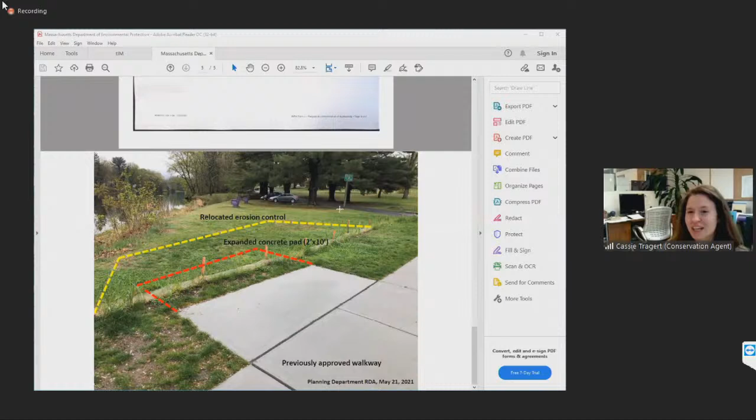Cassie, is that correct? Yeah, it is. I spoke with DEP about it, and you can't amend or extend a request for determination that has been issued, even though they're good for 3 years. So this is just, they needed a new one. So here you are. We can't amend and we can't extend determinations.

So are there any questions from members of the commission? No. Are there any questions from members of the public in attendance?

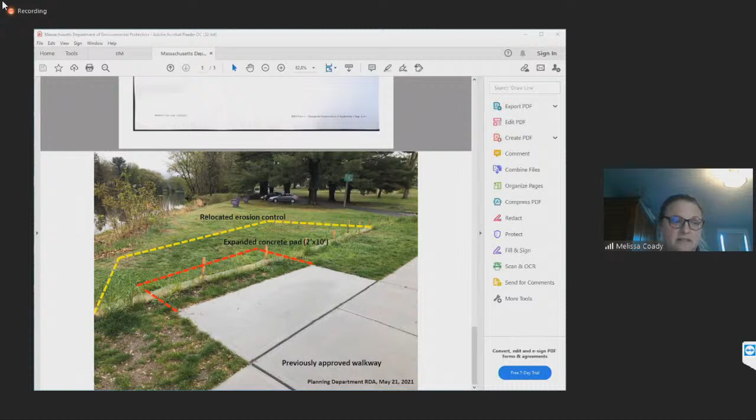Okay, Cassie, how was the previous determination phrased? Let me get the exact wording. I'm just gonna stop my share.

So previously, we issued a negative determination type 3, and the only special conditions were that the commission shall be contacted 48 hours before the start of work to inspect erosion controls, and shall be notified upon completion of the work to inspect the site stability before erosion controls are removed.

Thank you. Would anyone care to, with that in mind, make a motion? Motion to issue a negative determination type 3 with the same condition we had previously for the pre-construction inspection of the erosion controls. I'll second.

All those in favor, roll call vote. August, aye. Busa, aye. Buttrick, aye. Ryan, aye. Teffer, aye. Whittemore, not present. Motion carries. Thank you.

Can I ask one question? Of course. Okay, so based on what I just heard, it sounds like there has to be a 48-hour notice for when it would be poured. Did I understand that correctly? Yes.

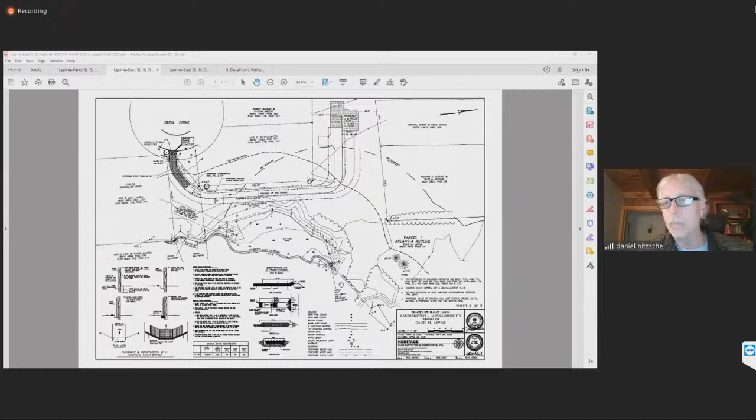So we started over by the detention basin on the southern end along that intermittent stream. I believe the documentation provided to the commission shows the stream stats data that confirms that it is an intermittent stream, despite the fact that local folks believe it flows a lot. It still doesn't meet the criteria of a perennial stream. Its watershed is too small in size.

So we confirmed the intermittent part, and then we delineated the edge of the old farm pond, essentially as a bordering vegetated wetland bordering on that stream down to the outlet structure. And then we flagged again on the downstream side, the B flagging, which is essentially bank flags, except B4 is really a BVW. There's a hill, there's a seep coming out of that slope around flag B4.

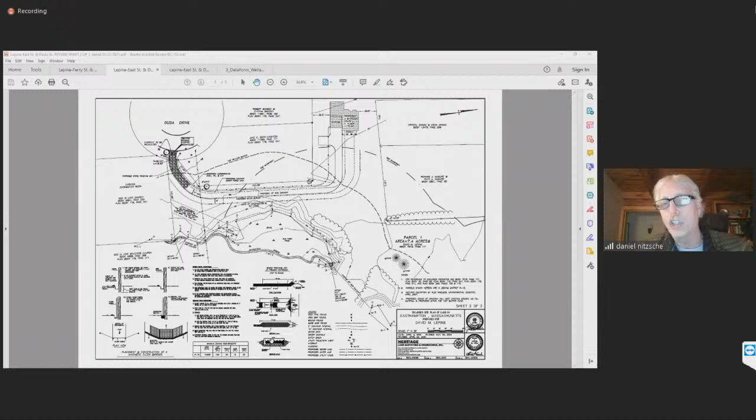So that's representing more of a bordering vegetated wetland point, but the remaining flags are essentially bank, or mean annual high water line, since that's a perennial stream going out in that direction.

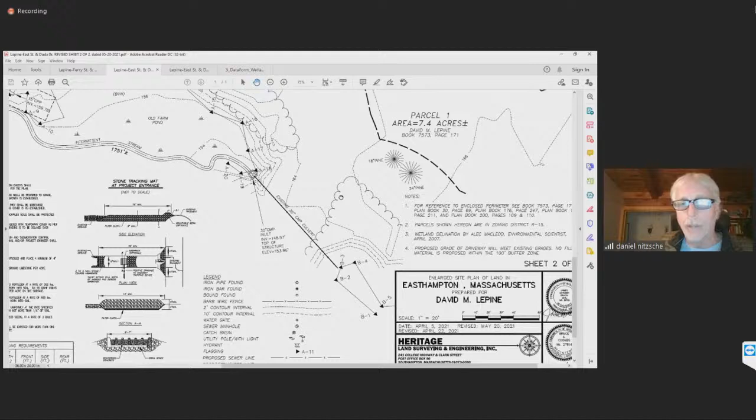And we provide a data form for flag 15 for the commission's review. So not much different than what Alec MacLeod put out there, other than I don't know if he had the drained pond. I'm assuming it was a drained pond at the time, but we had bordering vegetated wetland to that intermittent stream, and then the perennial stream on the outlet end.

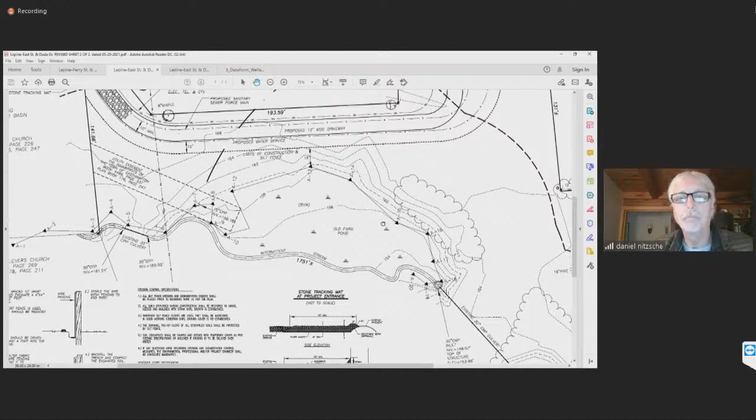Thank you. So with that, we could take questions from the commission.

I think we've covered what was asked of us and made the modifications, and we are in compliance with the regulations.

Thank you. Are there questions from any members of the commission before I ask mine? I had a question, thank you, Deborah. Mark, at last meeting I had asked how much disturbance there would be for the driveway. Were you able to come up with that?

Yes. So with the driveway, with the work within the riverfront area, it is 10,604 square feet within the riverfront area. The remaining section, which is within the 100-foot buffer zone, starts up here closer to Duda Drive and comes around the corner, is approximately 1,800 square feet of work in the 100-foot buffer zone for this area, which is outside the 200-foot riverfront area and within the 100-foot buffer zone.

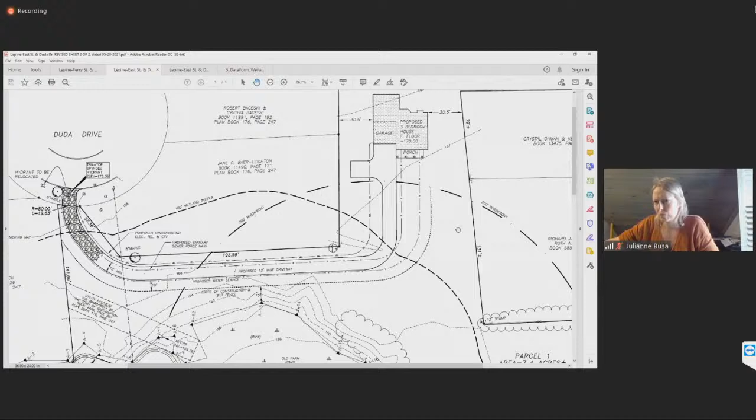So within our letter, which I can share with you, let me share that letter. I should have it here. So these are the performance standards and compliance measures for the entire property. This is part of the application that was submitted to the commission on the 20th. So we have a general narrative on the site conditions, the project description, the work within the buffer zone, the project design considerations.

And then we get into the riverfront area sections and describe the work in those design criteria. And then we go through the standards of A through D being here. So I don't know if you want me to read through those sections or how do you want to handle that?

So Mark, I guess I'm wondering, under no practicable or substantially equivalent economic alternatives, how was the scope of alternatives selected or determined? So what I'm asking is, the regs step through the type of activity relative to when the lot was recorded. Is that addressed in this document?

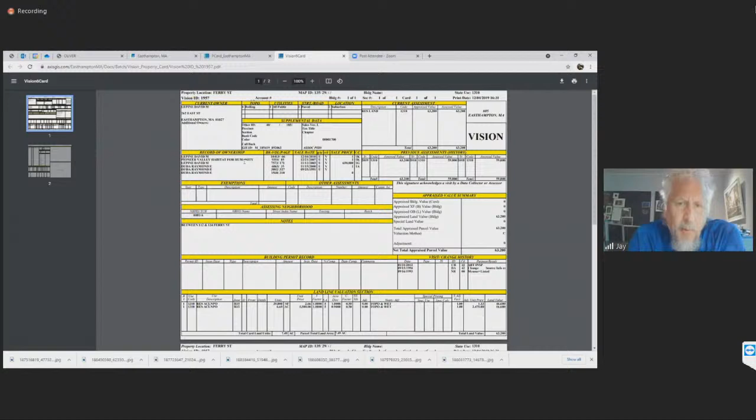I can even go on the registry's website, if you think this would be helpful, and we can go from there too. That might have some information. Right, and that's the original Duda farm parcel, which would be in that 1568, page 310. It's before 90, before 91 at some point.

The other thing, I don't know if this is helpful, I think is probably less helpful, is this other card. I think this is just general current parcel information, showing the last sale. I don't think this is as helpful. I think the previous one has more potentially useful information. Correct, so that was before 91, the next to the last transfer.

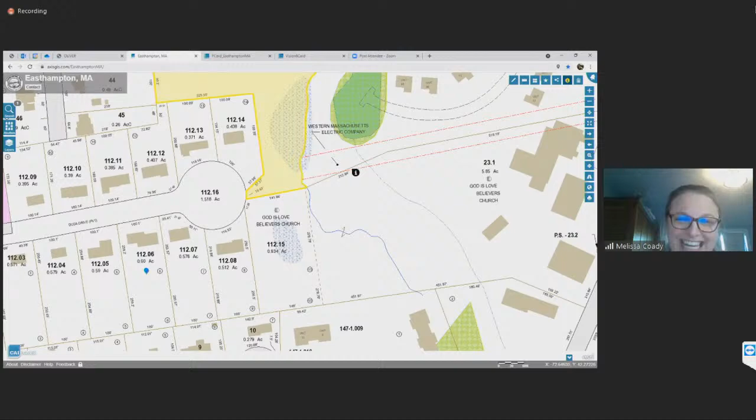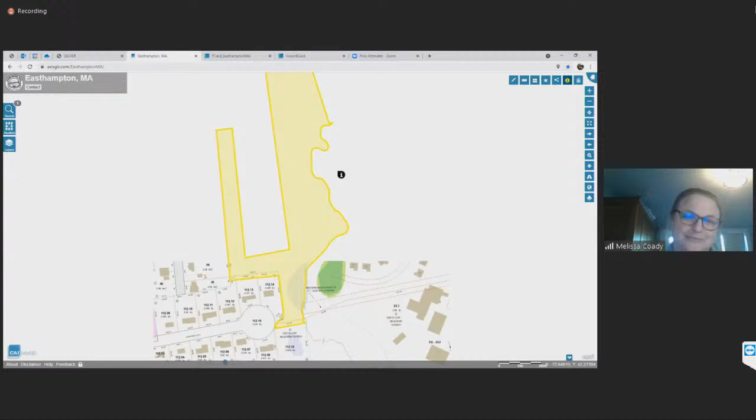And what's the total acreage of the parcel itself, just so we know if there's some continuity by reference in a deed? Oh, that should be here, it should be listed. It's very slow to load, unfortunately. Let me zoom out one more. It shows the total parcel area is 7.4 acres of land, shown on sheet 1.

While Cassie is reviewing that as part of this conversation, Mark, can you share photographs of the riverfront area where the driveway is proposed? Cassie has those based on our site visit that we did. And I can look on the registry of deeds site.

Cassie, is that book 15? Yep, so for the very first one, it's 1568/310. I'll keep this up, I'm gonna stop sharing, I'll pull up the pictures, Melissa, and show you. This is from the site visit. That's a very old deed book.

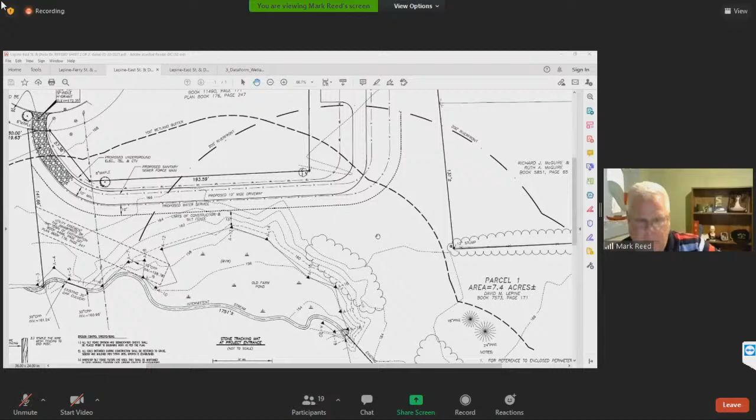Come on, share that picture please. So yeah, I don't believe so, Melissa. When we walked the property, there are no areas that would qualify under that. Unfortunately there's a lot of natural erosion of the embankment because of the steep slopes going all the way out to Ferry Street, but not anything that meets that criteria.

So can you kind of, do you have a scale tool? Can you scale off or approximate where the first 100 feet would be? It's a little atypical because we're in the arc, so I'm trying to visualize it. Right, and if that's the case, that concern will be assuaged. So where's my little scale here?

Unfortunately, this is not cooperating with me as far as my scaling tool. I don't believe so. But I don't have... my scale is not showing up on my PDF.

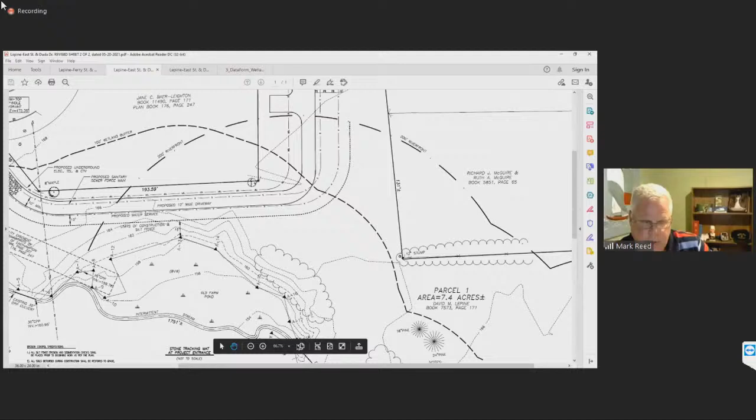Okay, so it is, I can scale it. I got a full-size copy of the plan sitting here in front of me on my desk. Can you do that and then kind of hover over the equivalent points? That would be perfect. So this is a 20 scale drawing.

So the first 100 feet is, so from that control structure, which the riverfront starts from that point, to the limit of work line is 110 feet. So we're outside the 100-foot. If you draw a line straight from here to here, it's 110 feet.

Thank you. I guess we should have put that in the dimensioning of that, but yes. Pros and cons of another line on the drawing, that's for sure. Right. Okay.

By the way, are there any other questions from commission members at this time? So with regard to the 100-foot discussion, we've shown that we're outside of the 100-foot, but I believe there's also a requirement that if there's not 100 feet of intact vegetation, you're asked to expand that to create a 100-foot buffer. Has that been considered?

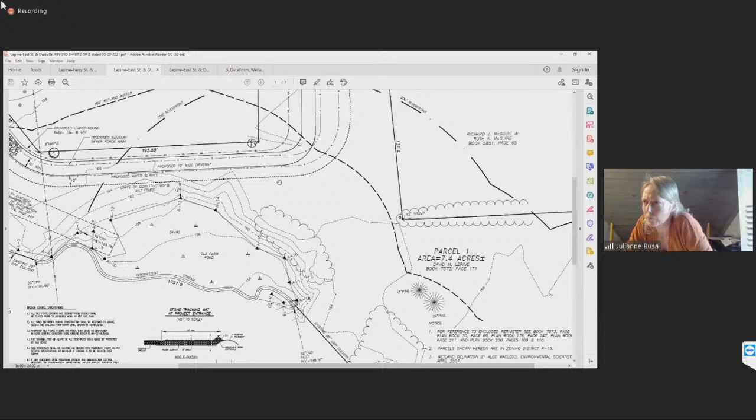The first 100 foot is all vegetated, like shown on those pictures that Cassie has. It's either the old farm fields and meadow, or brush. That showed, so it is vegetated.

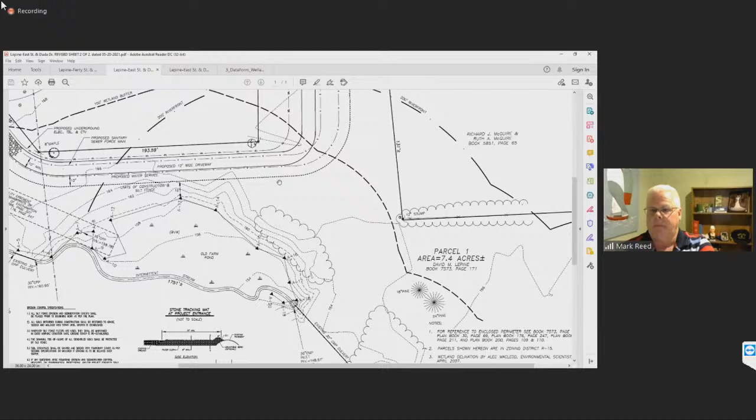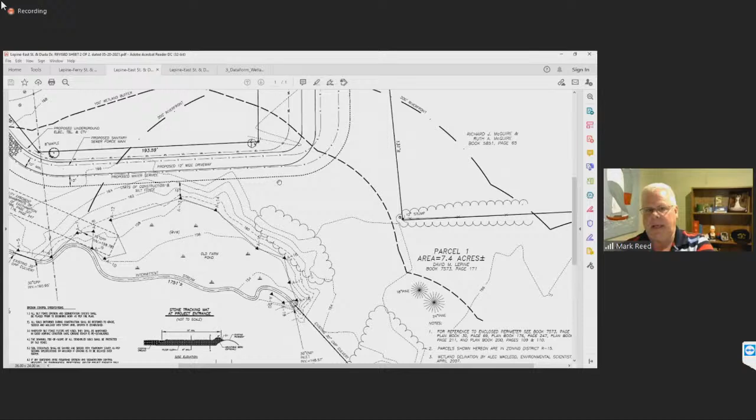But it's vegetated with something other than maintained lawn, it's undisturbed? Correct, it's undisturbed. Some of those pictures, further on, when they were showing the poles for the grow area, that's not lawn area. The lawn area really is where the proposed driveway is going to go, is the maintained lawn area. And that is maintained not by Mr. Lepine, it is maintained by the abutter.

Yeah, I can share my screen again and show those pictures if you want, Julie, of this kind of area beyond where the driveway is, beyond the curve of it. Oh, I'm sorry, I gotta stop sharing. Wake up, Mark. I didn't know if she wanted me to, yeah, if you guys wanted me to do it, I don't mind. No, I will stop sharing.

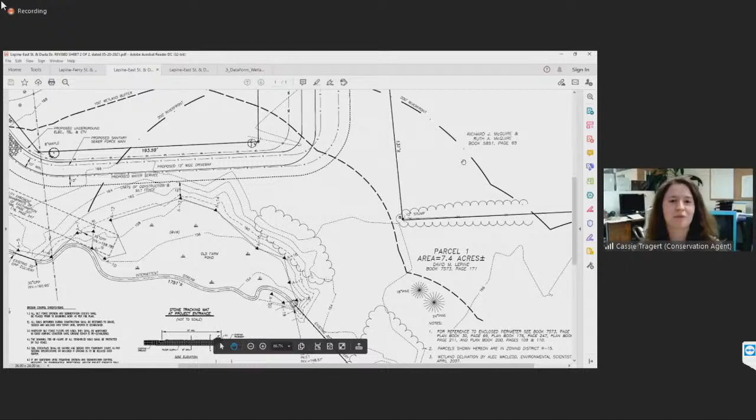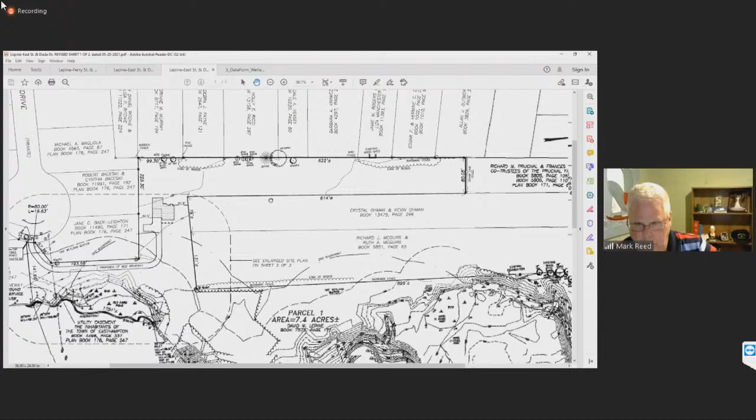So I guess this is the overall picture starting from Ferry Street of the property, coming in. There is a stormwater detention basin just to the south of the driveway coming in. Here's the end of Duda Drive, so the driveway's coming in this way. There's an existing stormwater basin that's associated with God is Love Church, which is located off of East Street.

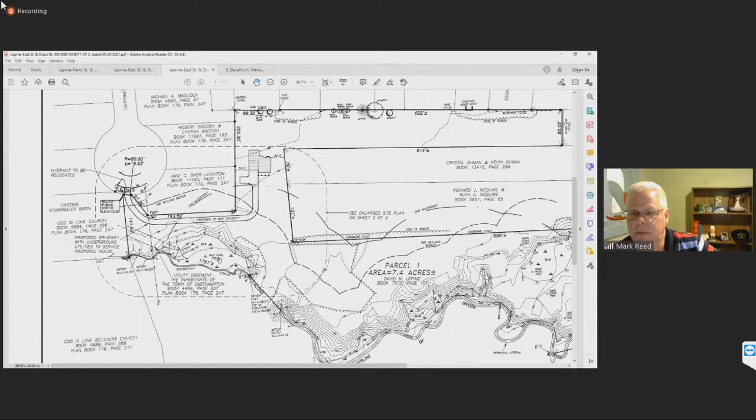And currently, right now, you can see the pictures. There's no standing water in the old farm pond. It's all vegetated. Well, they wouldn't be there all the time, but it's been such a dry year, it'd be impossible to know right now anyway.

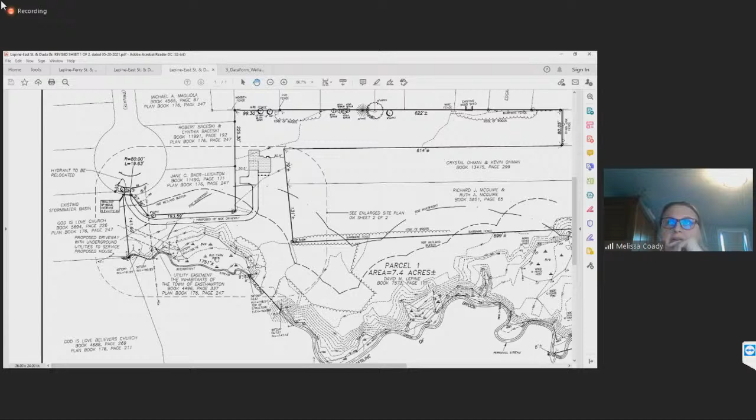So there are no natural heritage identified, certified, or potential vernal pools. Correct. Okay, thank you, Melissa. No, thank you for bringing that up.

Oh, I had a question before Mark took the map down. Oh, I'm sorry, I'll put it back. I'll put it back.

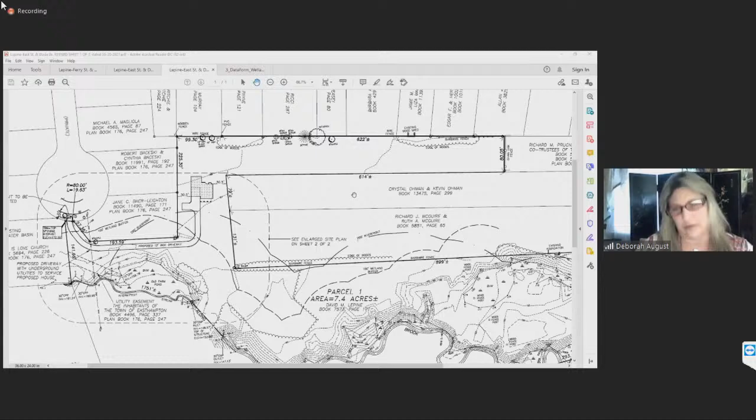So my question is, I was looking through the paperwork, and there's a proposal for a replication area for the BVW. I don't remember hearing about it in this meeting or the last meeting. I believe that references, for instance, if we were going to try to build a driveway access to the house off of Ferry Street, it would require crossing this intermittent stream. Let me zoom in on this.

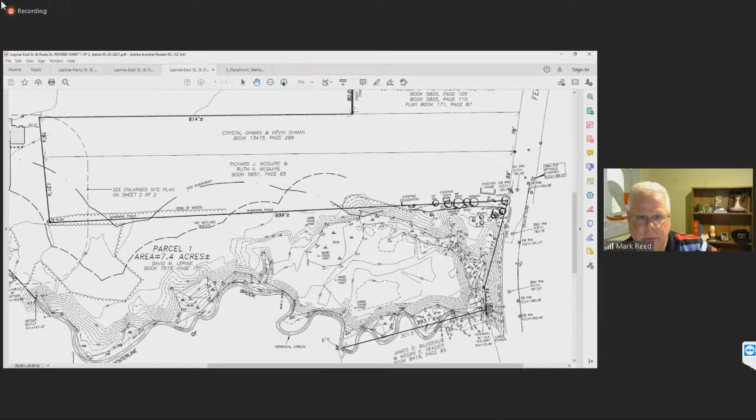So there's a series of the brook, the perennial stream. There's an intermittent stream that comes up into this wetland finger, and all BVW around here. So if someone was to try to build off of Ferry Street, they would have to put in a bridge crossing and potentially do some wetland fill or replication areas.

Just not economically feasible to do that. The topography is very steep. I know probably some years ago the commission had to deal with the washout of the road itself in this area, because of the steep slopes and the erosion in the area itself.

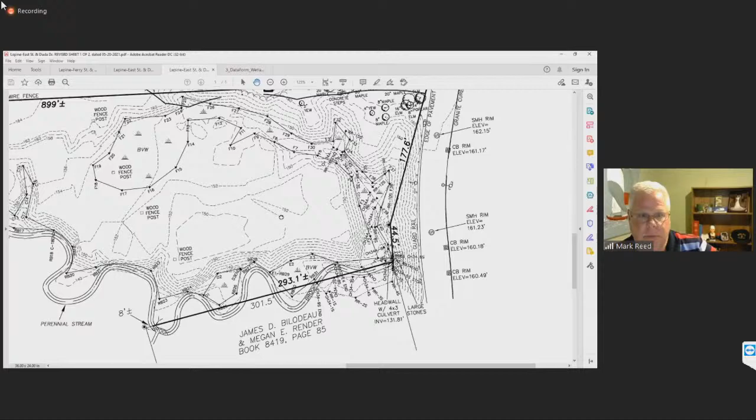So I believe that reference, Deborah, was to if somebody was going to try to come off of Ferry Street with the property, there may have to be some wetland replication. So that was part of your alternatives analysis. Correct. Okay, yeah, so it's not what is being proposed here. It's just that the only other place to come from is Ferry Street.

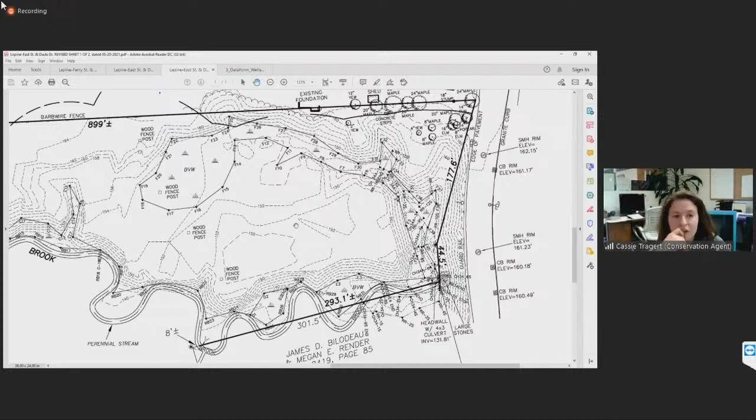Right, the only other legal frontage is off of Ferry Street for the piece. Okay, but we're not proposing that.

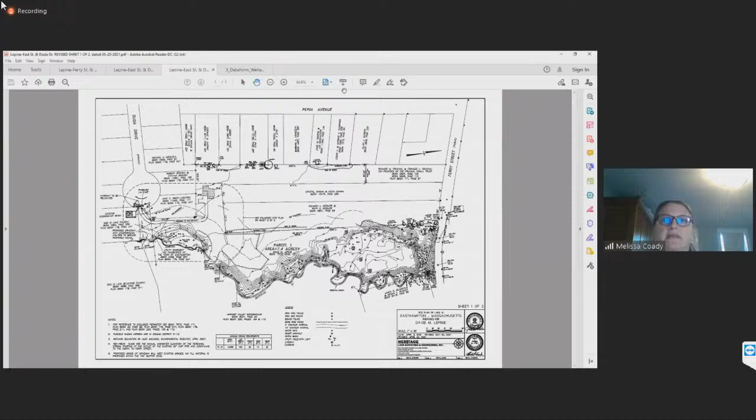Right, so it's a single family residence, which is exempt from the requirements for stormwater management. Yes. And we've located the house outside of the riverfront area, in the 100-foot buffer zone. Yep.

So is there any further discussion of the areas of riverfront within the footprint of proposed work, relative to wildlife habitat functions and values? Anyone? It seems fairly limited based on historic agricultural use and the maintained lawn footprint. Okay.

And then the final standard is proposed work shall not impair surface or groundwater quality. I would agree that stormwater management's not required, and erosion sedimentation controls have been included. And the nice thing is that it's vegetated.

Right, so the nice thing about this is that the proposed driveway that does come from Duda Drive can follow the existing topography with little or no grade change. If you notice, on the plan itself, it doesn't require a lot of cuts and fill to get a driveway in. So there's really limited land disturbance - enough to remove the topsoil, put some gravel down in the driveway, and that's it. So you can maintain the existing topography that you see out there today in those pictures, and that's shown on the plan.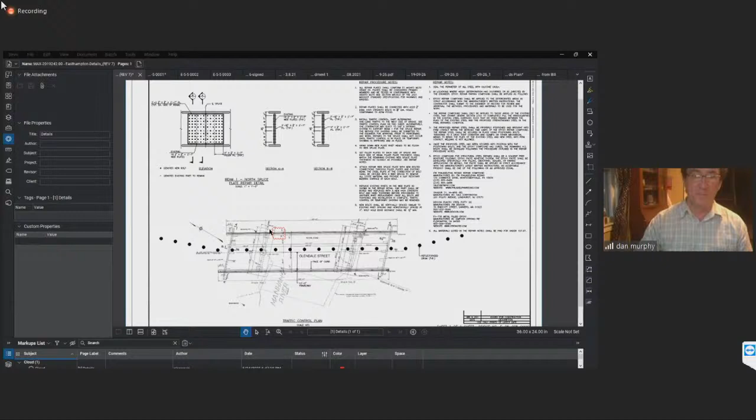So this is the location, Glendale Street over the Manhan River. This is the location - north is on the overhead wires side. The thing to do now is go to the repair detail, which shows a plan view, the repair area, and a bunch of notes, but I'll start off with just this plan view.

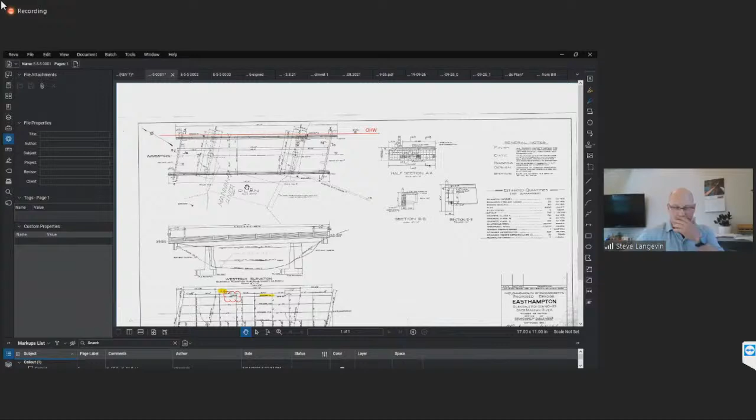So basically, this bridge was built in 1937, and it's a steel beam bridge. There's about 5 beams and a concrete deck. The beams are in very poor condition, but there are actually lots of locations that need repairs. The one area we're most concerned with, looking at a bird's eye view with north going up this way...

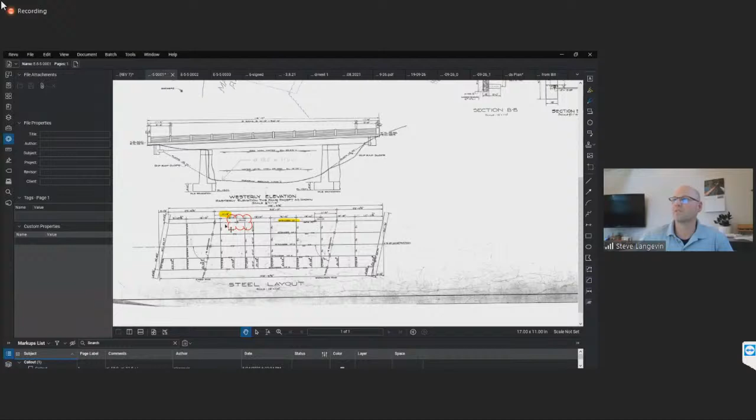There's this area on the northeast side - it's the north splice on this bridge where the 2 beams meet. It's a 3-span continuous bridge, which as a structural engineer is very impressive because in 1937 they didn't have computers to design this thing. That kind of blew me away a little bit - someone spent a lot of time designing this bridge.

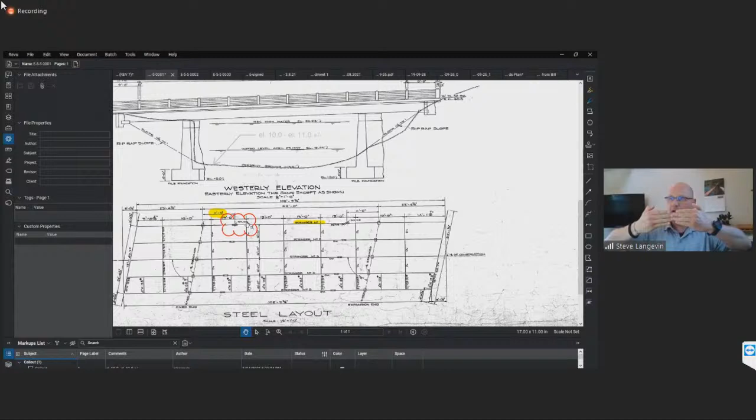Anyway, the beams come out to the site in 3 pieces, and at this location there's a splice that connects the pieces together during construction. Right along where the 2 beams meet, there are plates that connect with rivets, but there's a crack and a major section loss right at that location - so it's like the beams are kind of splitting apart a little bit, which in structural terms is very bad.

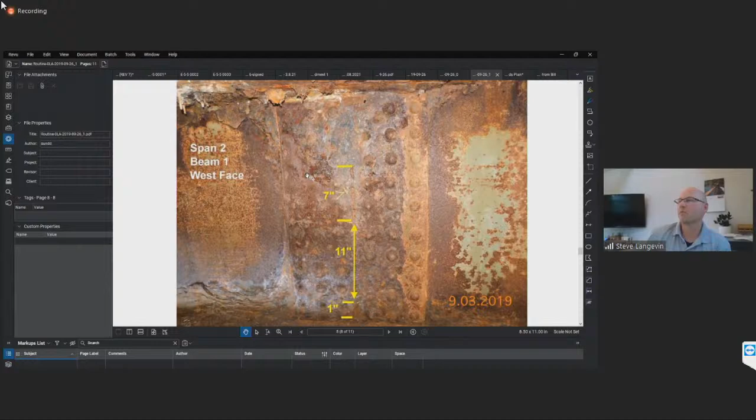So my repair detail, or GPI's repair detail, is to come in and put a larger plate over this area of the smaller plate. There are currently 60 rivets out there - we're going to expand that to 90 high strength bolts, and we're going to keep about 30 of the existing rivets in place.

In order to make this happen, we're going to make a sandwich of steel and put some epoxy in - this is actually a Mass DOT comment. They wanted to put epoxy in there, put the plates in place, and then gradually and carefully replace and add the new bolts, and also bore out some of the existing rivets.

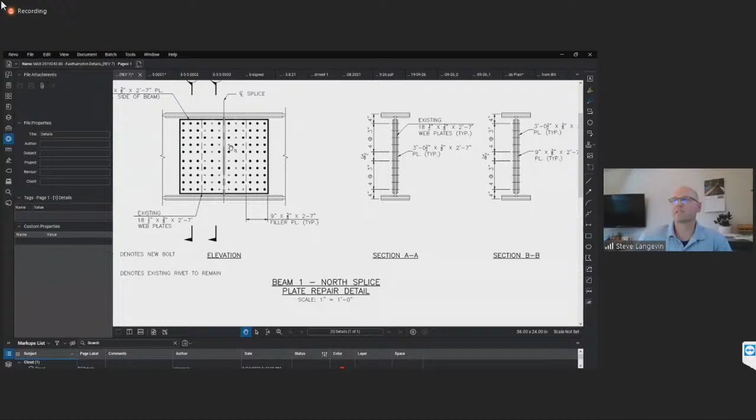Right now they're all corroded down, they're flat, and a lot of them aren't really doing their job anymore. There's still a lot in place, so it's not totally dangerous yet, but they still need to be replaced soon.

So that's the location again in plan view. What we're talking about doing is shutting down part of the road with some drums so there isn't live load extra loading on the area where that beam is during construction, while they're replacing some of those rivets with bolts.

That would be in lieu of doing any kind of shoring underwater. On the river, really what the contractor would have to do, from what I understand, is go in there with waders and some scaffolding, because it's probably about 20 feet above the riverbed, so they'll have to figure out a way to get up there and do the repair.

All the impacts to the river at that point are just to access the beams to do the repair, so there's not a lot of change going on and there shouldn't be too much disturbance. The beams are not being painted in the field, there's no welding, but there is grinding required, and the attachment of the plates.

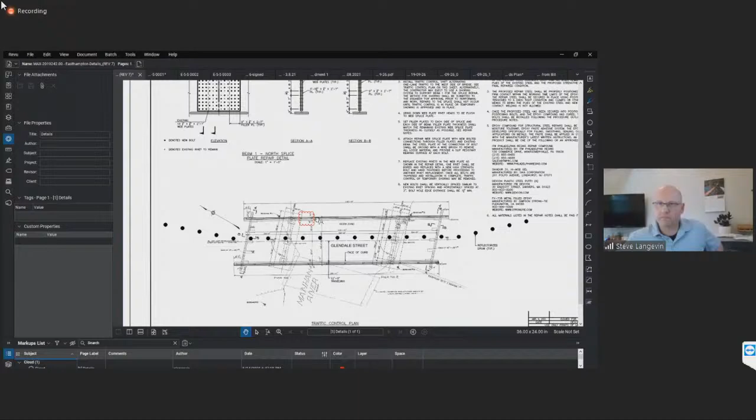Thanks, Steve. Our approach to this is, the repair is fairly straightforward and simple. The big thing for us is obviously access to the repair point there. Our thought was to get in the river with some scaffolding—it's like a 7x7 footprint, a little tower, and then it's about a 5-day job.

Since it's short term, we're thinking to stick a scaffold tower in the water so our guys can access it every day. It's probably a day to set it up and start cleaning up the repair, then we'd line it with poly to catch any rust flakes, and then just have at the repair. That's one of the approaches we think is the quickest.

Another approach would be to hang something off of the beams, but again, you're entering the water to make that happen as well. So just from looking at the scope, my opinion is to stick a shoring tower in there. I don't know if that affects anything for you guys.

Thanks. Sorry, putting in my dinner order.

The area is mapped as priority and estimated habitat. Do you know what the natural heritage has mapped at that area, at that location? I do not—that might be a good question to get an answer on. Cassie, I don't know if you've had any reason to look into that recently, but it could potentially be any number of things, and it does appear to follow the river corridor, so I'm not sure if it's aquatic or something that just likes to be near the river.

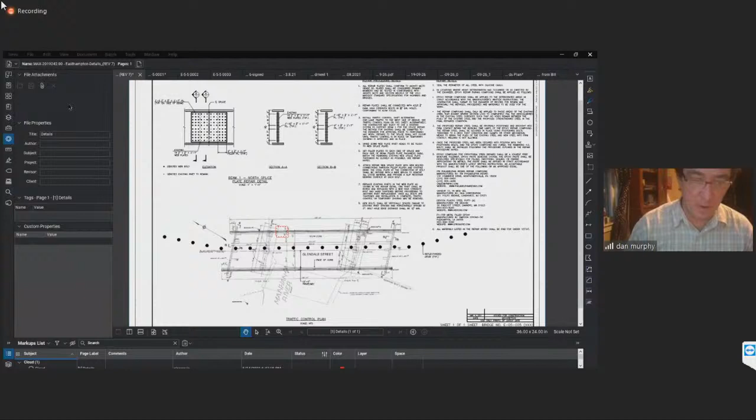You could reach out to Natural Heritage. Honestly, I think strategically that could be a consideration for how to make this go most expeditiously. Do you have a schedule in mind?

Well, we've got the contractor on board, and we're obviously hoping, as soon as we get approval from the commission, we're going to go.

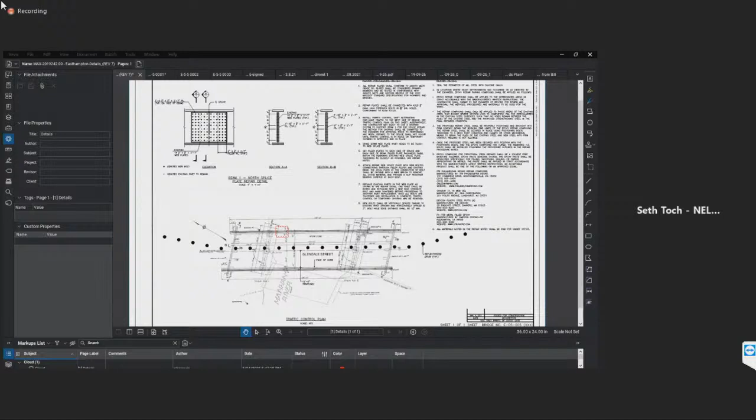I guess my main question was when you set up the scaffolding to secure it in place, is there going to have to be any ground disturbance within the riverbed? It's 4 posts, so it likely—I don't know what you guys would consider disturbing—but it's going to stick into the riverbed.

Do you know by how much? The legs on that thing are probably 8 inches.

So they're like 8 inches wide, but how deep? They're like 8 inches deep. They're like 2-inch posts, an inch and a half.

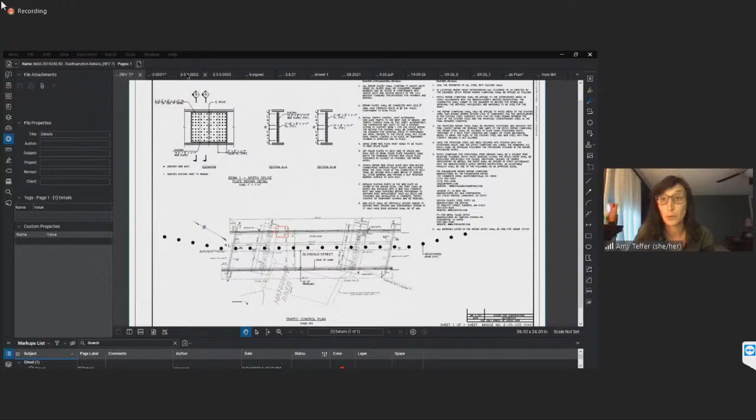Is the substrate fairly muddy, or is there enough bedrock substrate to actually put the scaffolding on? You'd know more about this than I do. It's a sandy bottom stream through there, sand bottom.

That's partly why I'm a little concerned about figuring out what Natural Heritage has mapped there. Drawing from personal experience, I've been told that under a bridge in a different place was where the largest specimens of a certain state-listed mussel were observed, so I want to make sure we're not on the wrong side of Natural Heritage on this.

If we can look into whether this would fit under that, I agree scaffolding and waders in a river is definitely a gray area. If we can get an answer on that and follow up with you, Dan, or if you can reach out to Natural Heritage.

And Cassie, maybe you can. Are you wanting a letter from Natural Heritage like we get with other projects, or just wanting them to tell you what kind of species are there? I'm wondering if you can just get an information request, a list of species.

Yeah, so it's in priority and estimated habitat. Natural Heritage is going to have jurisdiction under MESA and the Wetlands Protection Act, if that's the case. The benefit of a Notice of Intent is a streamlined review from Natural Heritage, holding them to 30 days instead of 60.

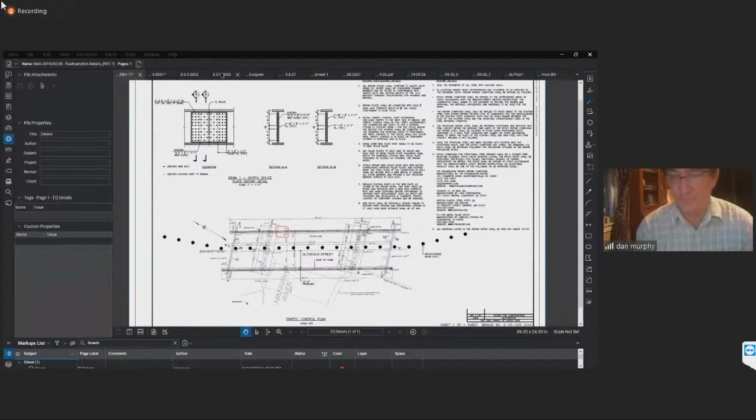I have just a question - does anybody know under what conditions bridge projects are Wetlands Protection Act exempt? When they're MassDOT projects - are we using MassDOT funding for this, Dan? I think it's when MassDOT does the project.

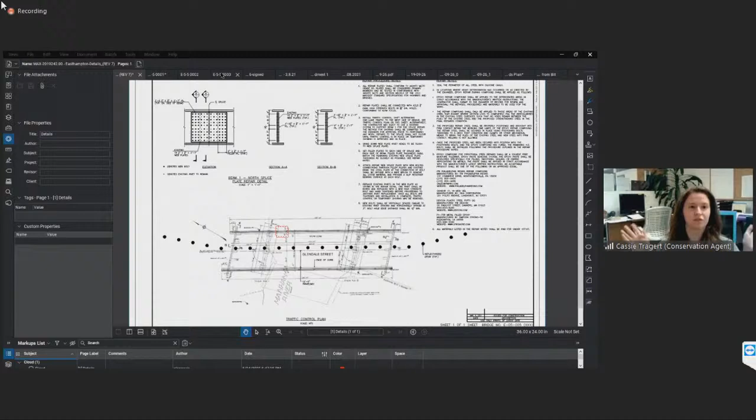No, this is ours. So barring whatever we find out from Natural Heritage, just with the nature of the work as it is, assuming Natural Heritage says they're fine with us - would they still need to get an NOI, or would it be an RDA, or would it be covered under the bundle? I think we have to figure out if it's covered under the bundle.

I don't know if this is appropriate, but in the interest of time, do you think that's something we could determine tonight? Do you have it handy? Can you pull it up? I have no recollection of the specifics of that table. I have it right here, hold on just a second.

So you're going to drill a bunch of new holes to apply this new plate to have more attachment points, right? So you'll collect the drilling remnants with poly or something - is that the plan? We'll typically line the platform with some 6 mil poly.

While Cassie's pulling that up, where do you envision how much of a staging area you need, and where will that be? We don't need a ton of space to do the work. By staging you mean like trucks and stuff? Yeah, where are people going to park - that's a road with no shoulder. We're going to have barrels set up right there, so there should be enough room for one truck, and that's all I need to perform the work.

We need to scroll down to the bridge - that one's hidden.